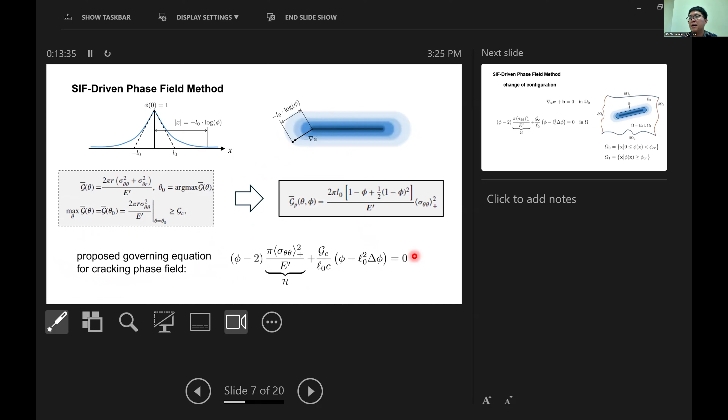And in doing so, eventually we propose a new governing equation for the cracking phase field method. It writes like this one. And now we have already got a driving force that has a solid foundation in linear elastic fracture mechanics. But the problem is still this: how can we make sure the stresses are accurate ahead of the crack tip?

So instead of using the degradation function here, as in the traditional phase field method, we adopted the idea of change of configuration. That means we don't have a degradation function here. Instead, we divide the whole domain into two parts. One is omega 0, which corresponds to the domain that has a phase field value greater than 0 and smaller than a critical phi. So this domain we will assume is just a sound material without any fracturing or cracking problem.

And then we have another domain where phi is greater than the critical value. So this domain we will treat as a cracking area, or just a crack in the space. So in doing so, we just solve the linear momentum balance equation in the omega 0 domain, and we don't do that in the omega 1 domain. And this can be done by FEniCS. And then for the phase field method, we solve it in the whole domain. So the whole domain refers to the union of omega 0 and omega 1.

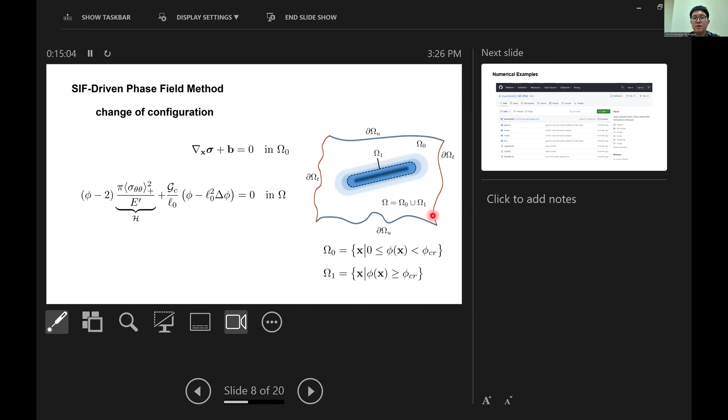So basically that's pretty much what I want to cover. And now I want to show some numerical examples to validate our method and see the application of our method.

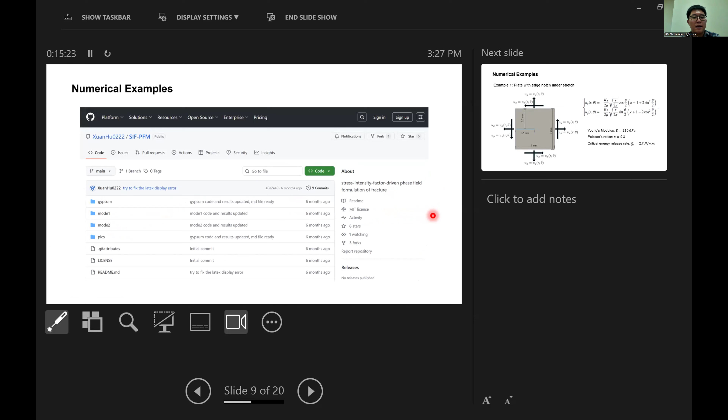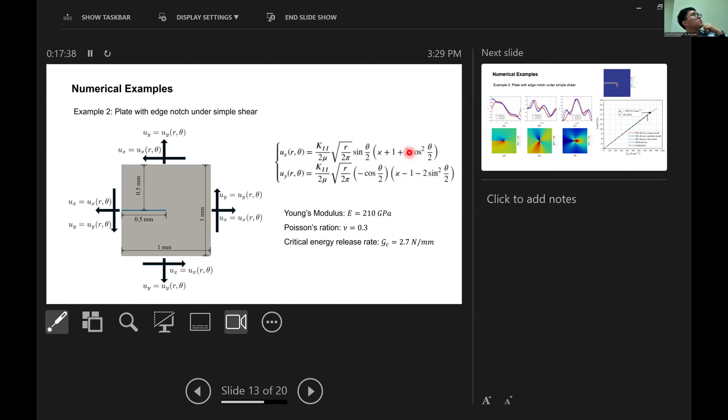Yeah, so this is a first example to validate our model, and we continue our journey by looking at the mode 2 loading. So basically, we just specify the mode 2 loading on the boundaries of this plate. We use the same material properties as we used in previous research, and we can see still the stress field ahead of the crack tip, the so-called asymptotic stress field, aligns very well with the analytical solution. And yeah, these are the distribution of the stress over the domain, and we can see the crack also propagates.

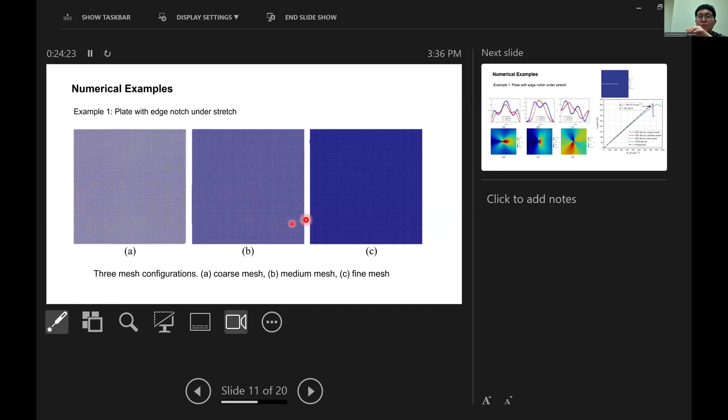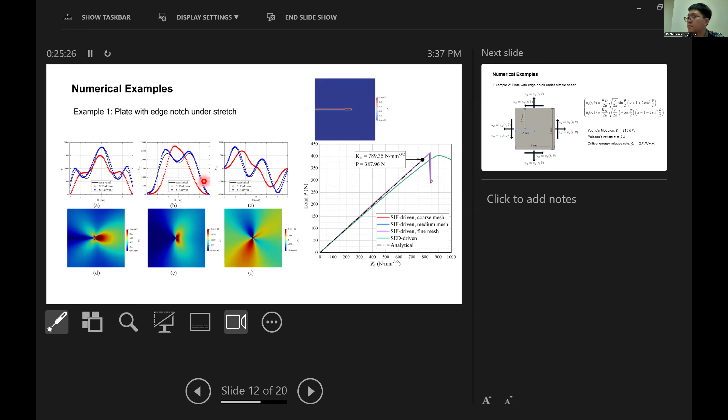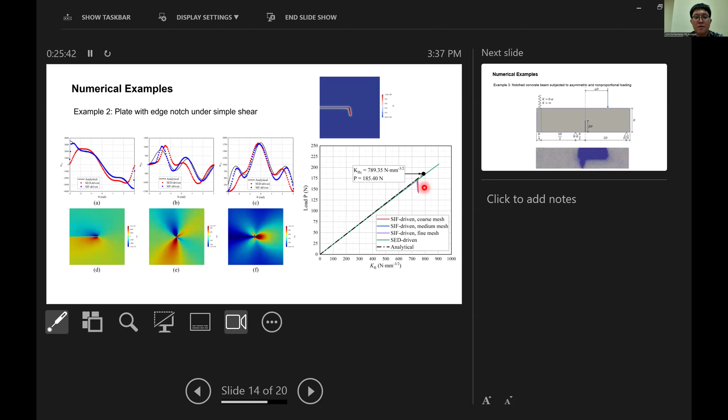Yes. So in the third example you show, maybe the last one. No, one of the... This one? No. You can go forward. This one. Okay. You can see in the experiment data, there's some drop in the displacement after reaching the peak, which isn't shown in your numerical solution. So what's the reason that you have a drop in the displacement here?

From the theory perspective, it is because we use linear elastic fracture mechanics theory, so it's just going up and dropping down. It doesn't have any cohesive behavior. I think this post-peak branch corresponds to the cohesive behavior in the material, and this part hasn't been investigated in my research. Another reason is that I observed the crack can propagate really quickly in the phase field method if you don't have any cohesive behavior introduced, so this is why there's a sudden drop from the top to the bottom. I think how to incorporate the cohesive behavior after crack initiation is an interesting topic to explore.

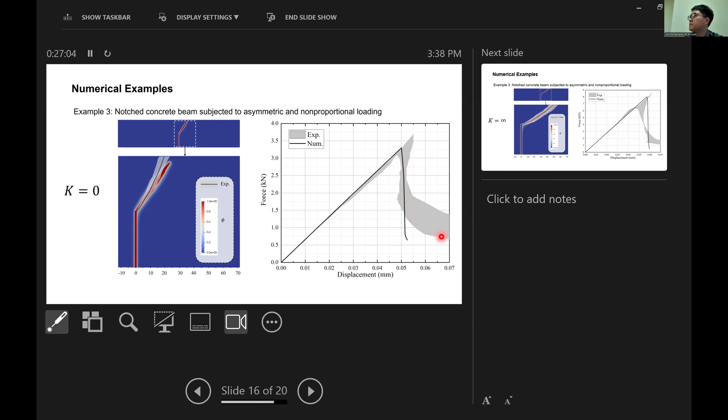Can you go to the last slide? You see that the tensile fracture is there, and then there are shear fractures, right? Why don't you have shear fracture in your next one? So, I'm not sure. My theory is that this shear fracture actually corresponds to a domain, one area that's being totally damaged. So it's not a very clear fracture line there. It's just so many tiny fracture lines, crack lines here. So I guess that's it.

So yeah, I'm also interested in why we don't have this point. Maybe it's because of some flaws that are inherently here or here. I'm not sure. I guess I need to investigate this problem later.

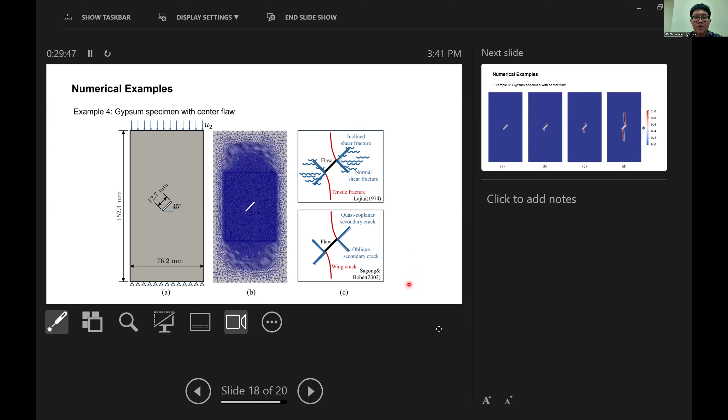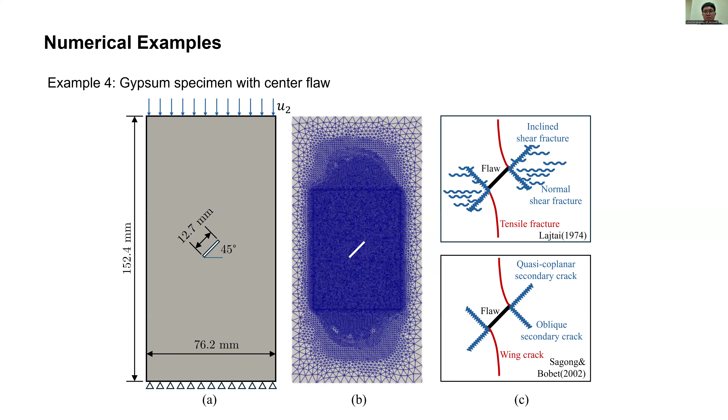Okay, so that's the end of this part, and then I just want to show briefly my way to use FEniCS. Yeah, you might be able to share. Oh, okay. Full screen. Okay. So my way to use FEniCS.

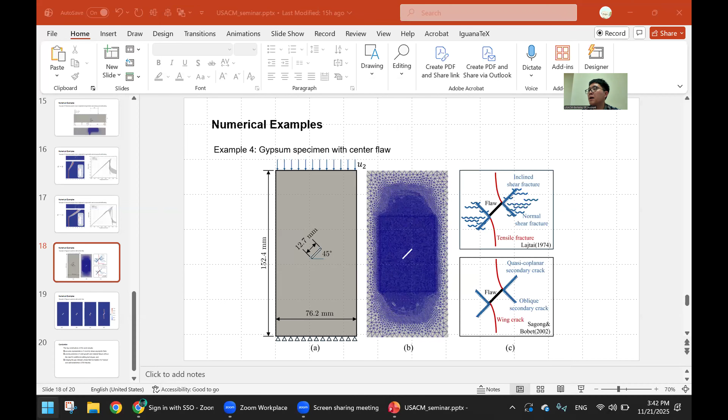Well, if you have an Ubuntu or Linux system, you don't have to look at this part. Just in case you don't have one, I think the best way to use Ubuntu and FEniCS in a Windows system is through VS Code, and in that case you need to install the Linux system. It's called WSL. So first of all, you need to install WSL in your Windows system, and you can find so many tutorials online, like how to activate WSL in Windows. You can just follow those command lines one by one, and then you can install it.